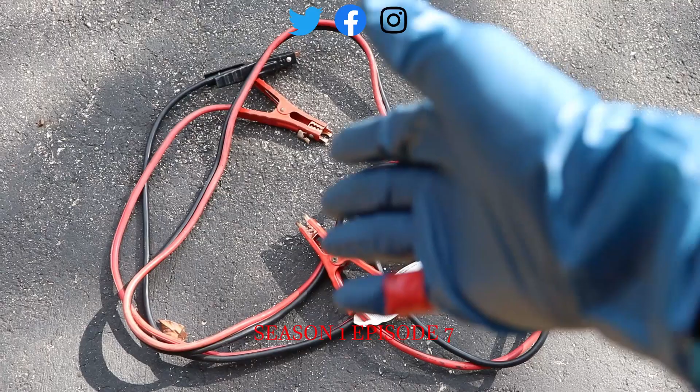If you watched Season 1, Episode 6, you remember that we talked about how to properly jump a dead vehicle. In this episode, Season 1, Episode 7, we're going to be talking about how to pick the right jumper cables.

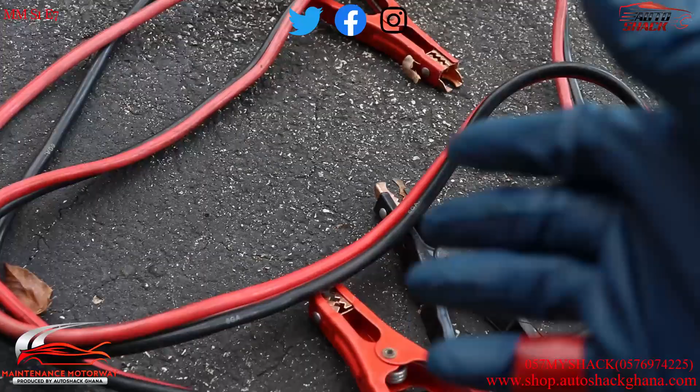Now this video is going to be a bit more technical, but we're going to really try to simplify it, because our goal is to provide as much information as possible to vehicle owners in a very simplified way, so that they have as much information as possible to make the best decisions for their vehicles. That ties into vehicle longevity, ties into safety on the road and things like that. So sit tight, guys. It's going to be technical, but it's still going to be fun. So let's get to it.

Jumper cables come in different sizes, and the most important thing you want to focus on when it comes to jumper cables is the thickness of the cable. We're going to get into that shortly, but this is a 6GA, basically a 6 gauge jumper cable. If you watched our video in Season 1, Episode 6, we talked about the importance of the thickness, and we recommended going with a 6 gauge. In this video, we're going to be talking about the different gauge sizes and how they actually affect the jumper cable's ability to start a dead vehicle.

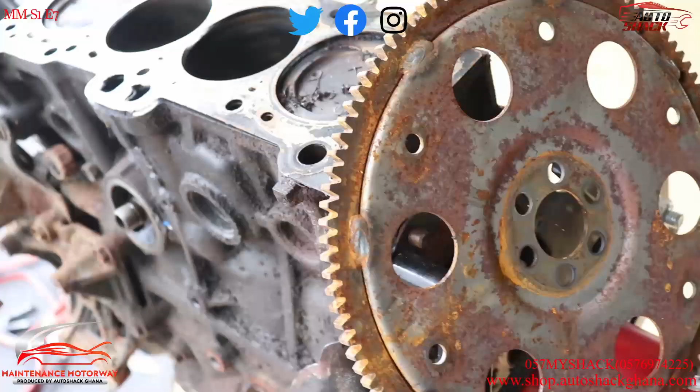Okay guys, so this is an engine that we have here in the shop, and I'm going to use this engine to demonstrate what we're talking about here. So we just want to start from scratch. Now the purpose of jumping a vehicle is to get your starter to turn the engine.

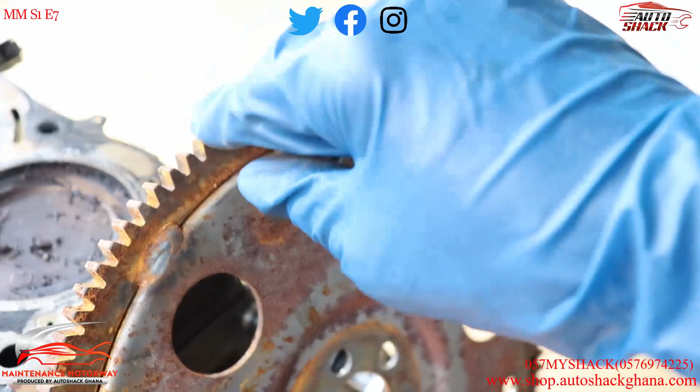Now this actually sits in here, but we're taking it out. It sits at the back of the engine here. This is called a flex plate, and automatic transmissions have a flex plate while manual transmissions have a flywheel. I'm sure most of you have heard of a flywheel before. So how this works is that I don't have a starter with me, but basically the starter sits on the engine as well, and it has gears that connect into these holes here. This is called the starter ring gear, and the starter itself has a pinion gear. So the pinion gear contacts this ring gear, and when you start your car, the starter contacts this and turns this pinion gear, and that turns the whole flywheel and turns the engine and gets the car started. Okay, so that's how this process works.

The starter needs a lot of current to start the engine, and what we're going to see is that the current available to the engine is related to how thick your jumper cables are. That's what we're going to talk about today, and we're going to prove that today. That's why it's so important that you have the correct jumper cables in your vehicle to start your engine, just in case you have an emergency by the roadside. Okay, so let's get to it.

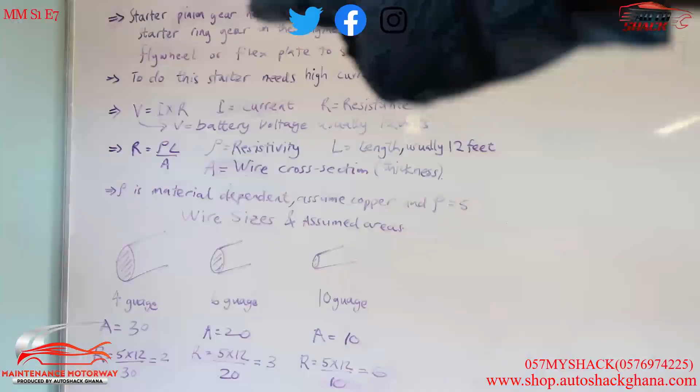All right, so as we were saying, the starter pinion gear needs to engage the starter ring gear, which is on the flywheel or the flex plate of the engine, and start the engine. So that's how the engine gets started.

Now to do this, the starter needs high current, a lot of current. Some of you guys may be interested in this, but the process through which this current is generated is called electromagnetism. Basically the starter contains a magnet, so when you run electricity through it, it interacts with the magnet, and that is the process of electromagnetism, and that is what really generates this current here.

So that's just by the way, if you want any more technical detail there.

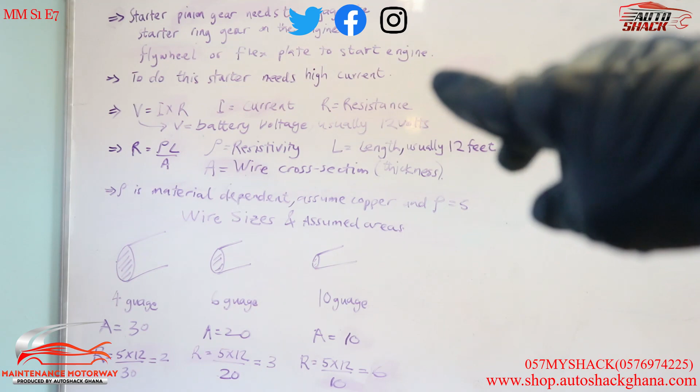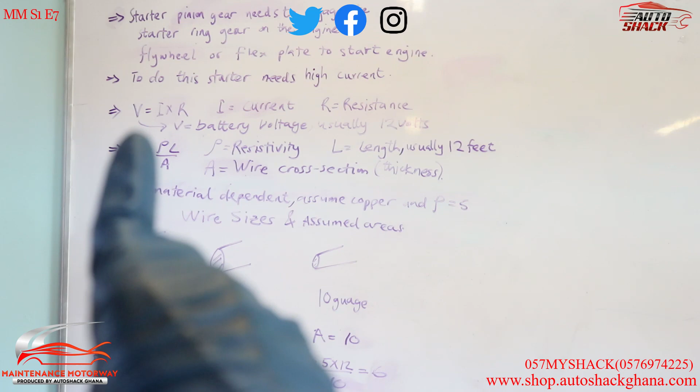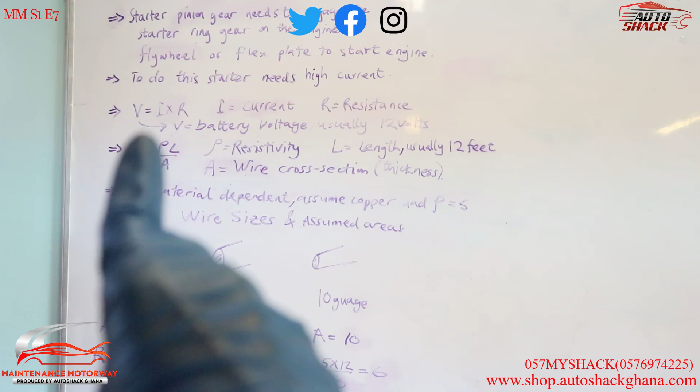Now right here we have V equals I times R, where I is the current and R is the resistance. We're going to get into that shortly, but this V is basically the battery voltage. Most cars have 12 volts for the battery, so we have 12 volts available for the generation of the current.

Now the current and resistance you can think of this way. When you have water flowing through a hose and you block the hose a little bit, you are basically providing resistance. Once you take your finger off the hose, you have more water flowing again, and that's basically the current. So the flowing water is the current, and when you put your finger over the hose, that is the resistance. I hope that makes sense.

So for our purposes, we want the resistance to be as low as possible and the current to be as high as is needed by the starter.

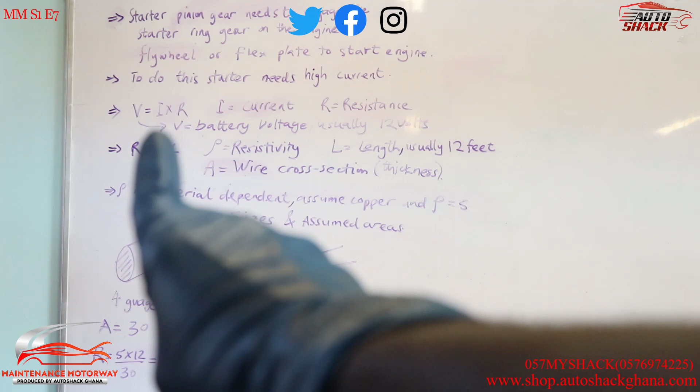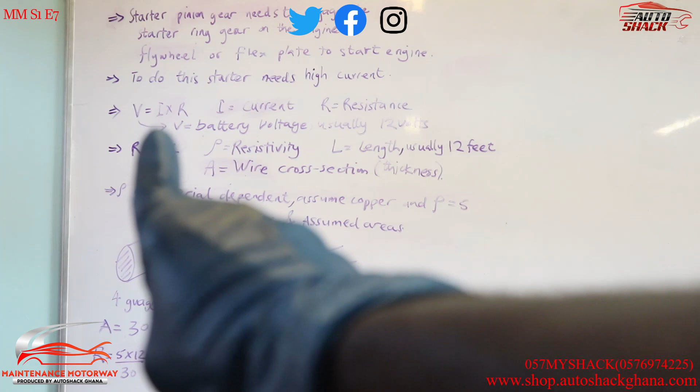So for instance, if we already have a battery voltage of 12 volts, if we have a resistance of say 6, it means we're going to get 2 for the current. If we have a resistance of say 4, then we're going to get 3 for the current. I hope this makes sense. We want as much current as possible so that we can get enough current for the starter.

Starters require current between 150 and 300 amps, so that's a lot of current. So we want this resistance to be small.

The resistance itself is a factor of a couple of things. One is what we call the resistivity, another is the length, and the other thing we really want to focus on today is the cross section of the wire, in this case the thickness of the jumper cable we are looking at.

This resistivity depends on the material, and usually jumper cables are made of some kind of copper, so the resistivity is usually the same throughout the different materials. We're going to simplify that and say we'll go with a resistivity of 5, just to simplify it.

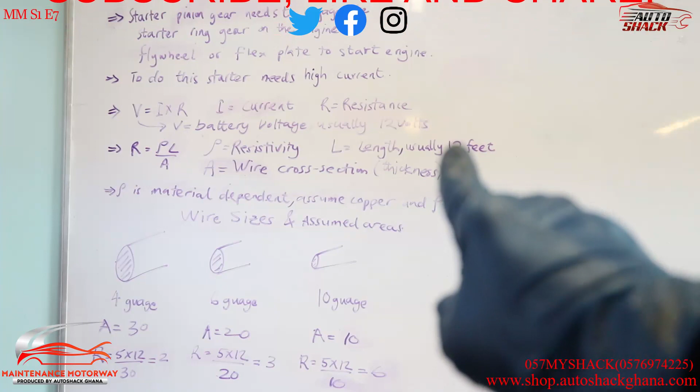One thing I forgot to mention is that the length is also a factor. The length of the jumper cable matters. Let's standardize this and say a length of 12, which is pretty standard if you're going to buy jumper cables — usually 12 feet is the standard length you find on the market. So this resistivity times this length together will give us 12 times 5, which is 60, just to simplify this.

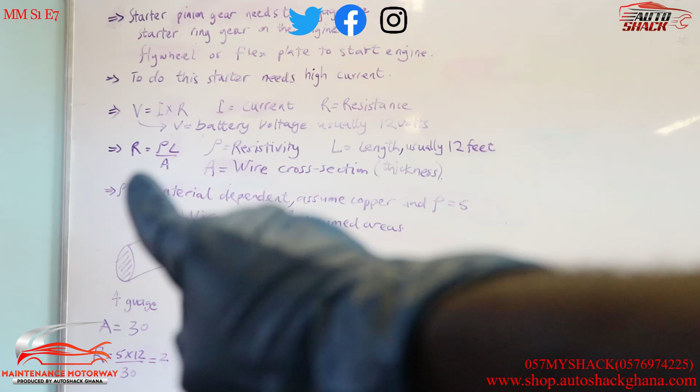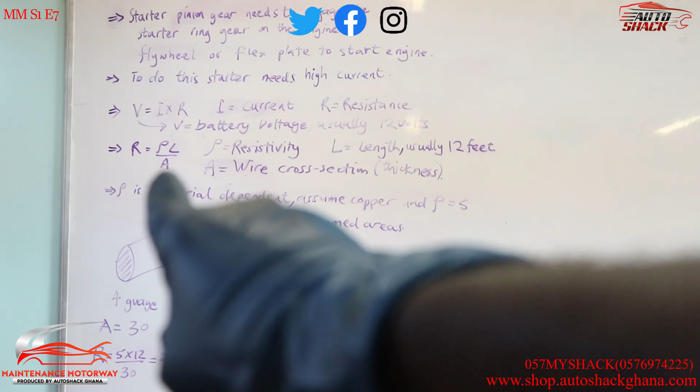Now we're going to get into how the jumper cable thickness actually affects everything. All these factors — resistivity, length, and A, which is the cross-sectional area or thickness of the wire — are the things that dictate the resistance. We want this resistance to be small, don't forget that. So if you look at this formula, as the cross-sectional area gets bigger, the resistance gets smaller, and vice versa.

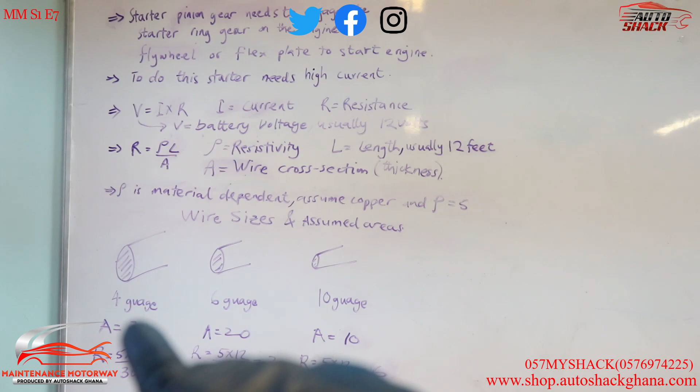Now again, in the interest of simplifying, we have different wire gauges here. We just looked at wire gauges at the beginning of this episode. The thing about wire gauges is that the smaller the number, the thicker the wire. That's quite interesting — it's not intuitive, but that's how it is. So if you look at this 4-gauge wire, it's thick, thicker than the 6-gauge wire, and the 6-gauge wire in turn is thicker than the 10-gauge wire. It's just how it works.

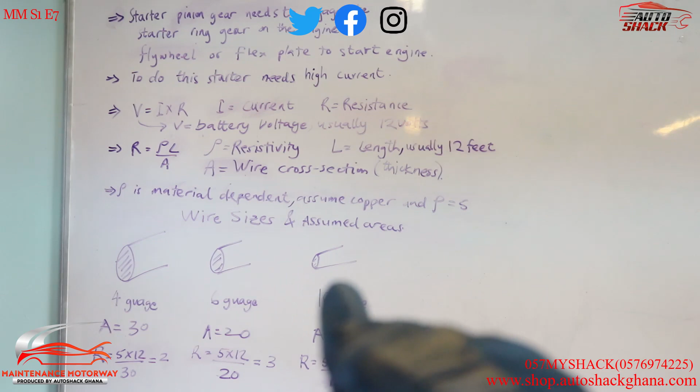So if there was a 20-gauge wire, it would be smaller than all these, okay? There is a 20-gauge wire, but those aren't used for jumper cables because they're just too small. So this is what we have.

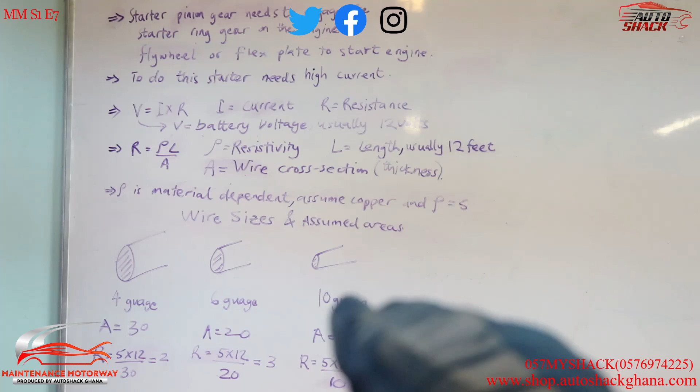Now, here we further assume that this 4-gauge wire has a cross-sectional area of 30. This 6-gauge wire has a cross-sectional area of 20. And this 10-gauge wire has a cross-sectional area of 10, okay? Just to simplify the calculations.

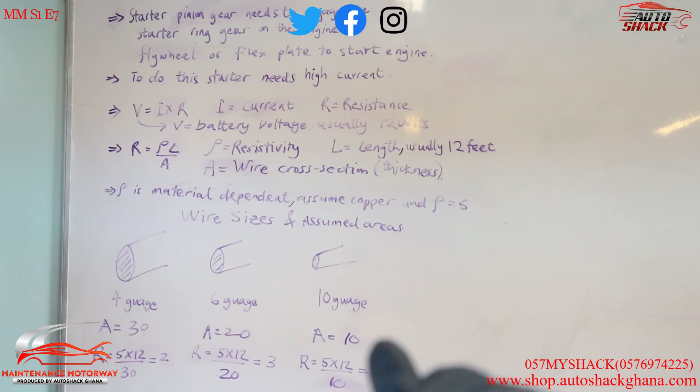Since we know all the cross-sectional areas, and we know the resistivity, the rho, to be 5, and the length to be 12, we know that we want the resistance to be as low as possible, so that we can get the highest current. Now, if you look at this thick wire, the thickest wire, we divide the resistivity and the length by the cross-sectional area. This gives us 2. So that's 5 times 12, which is 60, divided by the 30, which is 2.

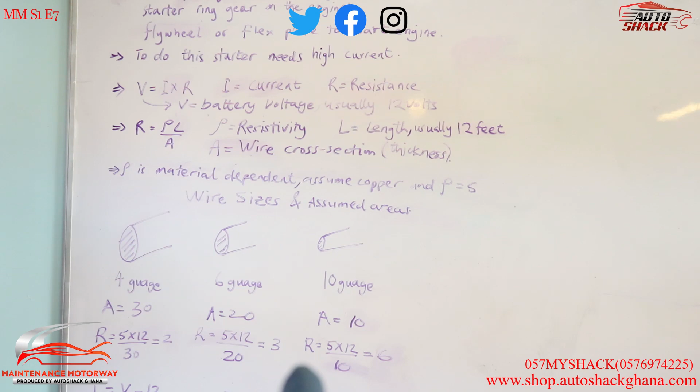And then we do a similar thing here to get the resistance for this 6-gauge wire. That comes to 3. And then a similar thing for the 10-gauge wire comes to 6.

So now, how does this all play into our final current, which is needed for starting the starter, okay? Now, based on, we know that our voltage is I times R, so to get our I, which is the current needed for the starter, that's going to be V over R, okay? So we have here for the current for the thickest wire, we have 12 over this 2, which is...

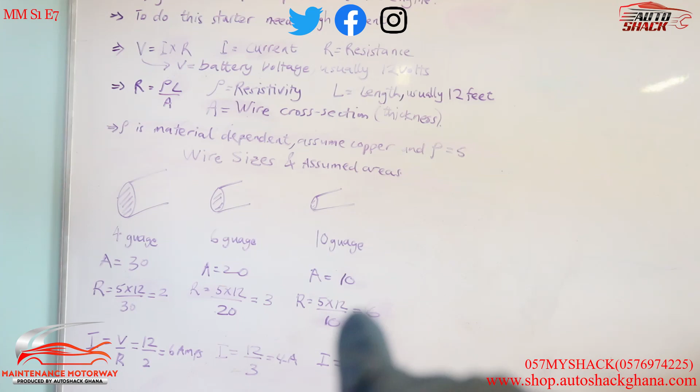6 amps, okay? And then for the 6-gauge wire, we have 12 divided by this resistance, which is 3. That gives us 4 amps. And then for the thinnest wire, we have 12 divided by 6, which gives us 2 amps.

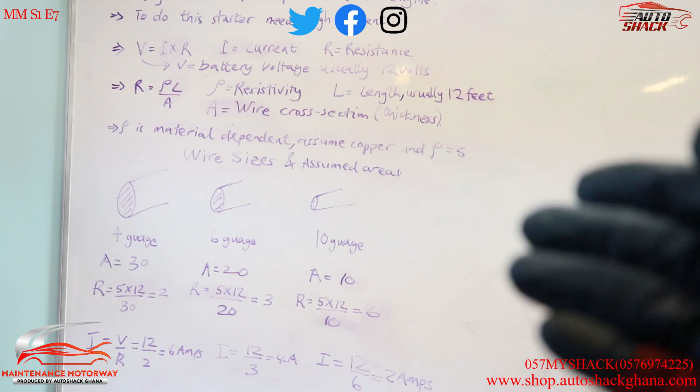So you can see that the thicker the wire, the more current we have to jumpstart our vehicle. So that's extremely important. So this is really the gist of it.

Now the question is, based on your kind of vehicle, what kind of jumper cable thickness do you have to buy? What gauge jumper cable do you have to buy? So if your vehicle is like a V6 and below, we recommend you get the 6-gauge wire. If you have anything more than a V6, like a V8 or V12 and stuff like that, you want to get a 4-gauge, because that's definitely going to have more current to start your vehicle.

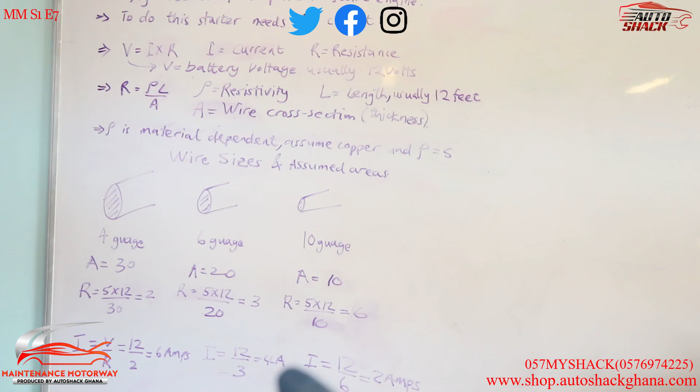Now, mind you, these are just numbers that we use to explain the whole concept, but starters require a lot more than this. Like I was saying, 300 amps is not unusual to see on a starter for a sizable engine. So these are just round numbers to make it easy for you to understand. But you definitely want to have at least a 6-gauge if you have anything V6 and below, and a 4-gauge if you have more than a V6 engine.

I mean, if you want to go 10-gauge, you can. There's also 8-gauge if you want, which will fall in between this and that. So if you have like a Matiz or a Picanto or an Atos, you can go with either a 10-gauge or an 8-gauge, which falls in between here, like we're talking about. But we really recommend nothing thinner than a 6-gauge, just to make sure that you have enough thickness on your jumper cables to start your vehicle.